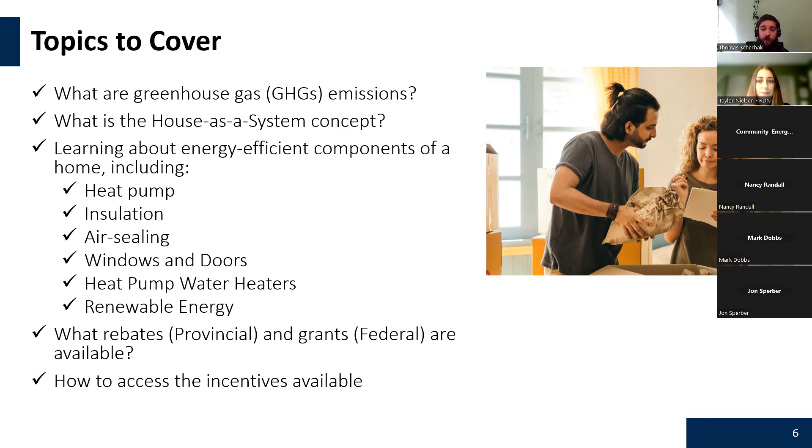Thank you so much, Taylor, for that information and those great incentives and rebates for your local area. Today we will cover a lot of topics and a wide range of things, going through first the greenhouse gas emissions, house as a system, and then all the different rebates and grants that you have available, and each program that it contributes to.

The first item we will go quickly through is what is greenhouse gas emissions. Greenhouse gas emissions are a combination of three different gases. The main gas that we're typically concerned with is methane gas, which is what natural gas is typically made of. A lot of these are contributed by human based activities, deforestation, agriculture, industrial areas, and things like that which do contribute to the greenhouse gas emissions overall.

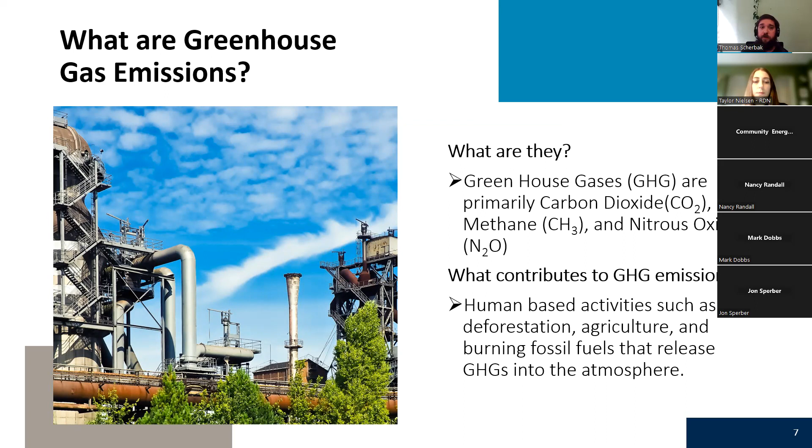When looking into our emissions for our home, natural gas takes up about 16 times as much energy for the greenhouse gas emissions, meaning there is 16 times the amount of total emissions coming from natural gas per se. Metro Vancouver has over about 90% of its total heating still done by natural gas, which is a big number and could be reduced at a much higher rate.

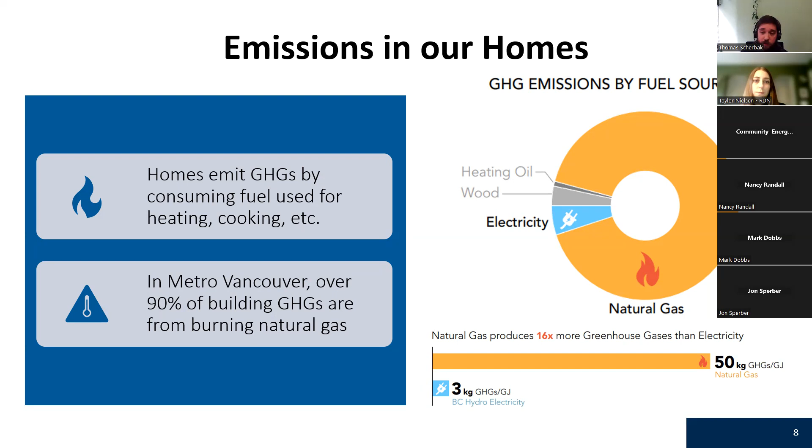Here's a good comparative to see how the oil heating and emission spectrums compare between the three different types. So we have oil heating, natural gas heating, and also a heat pump. Heat pumps do produce a little bit of emissions, but not as much compared to the other two.

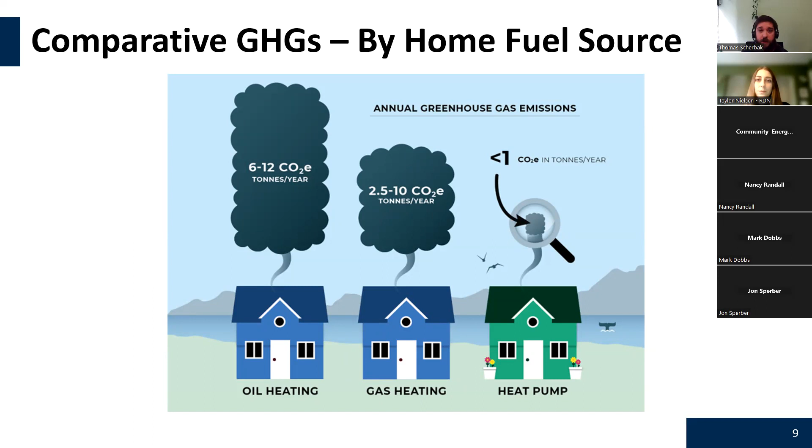Overall, the reason we want to do this is because BC has one of the cleanest green energy grids. We have about 98% of total energy generated by hydroelectric power, that's about 12,000 megawatts of hydroelectric generating capacity, with the caveat that 70% of our economy is still powered by fossil fuels. So the main goal for BC residents is to work together to create a clean electricity grid.

These are the different types of upgrades we'll go through, such as air and water heating, air sealing, windows, solar, and other things within that program.

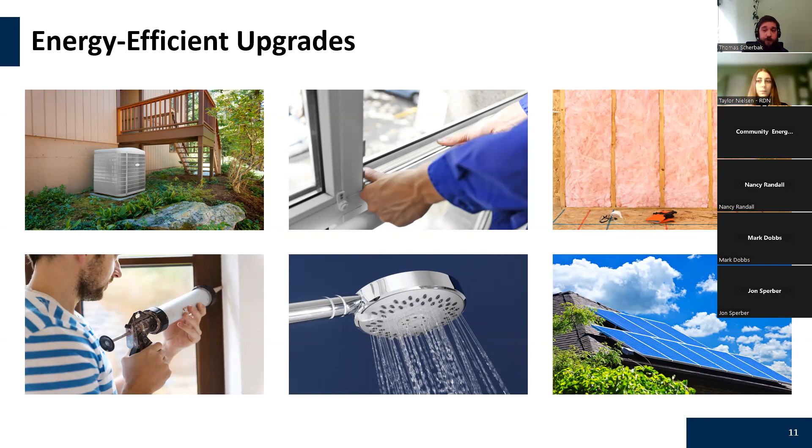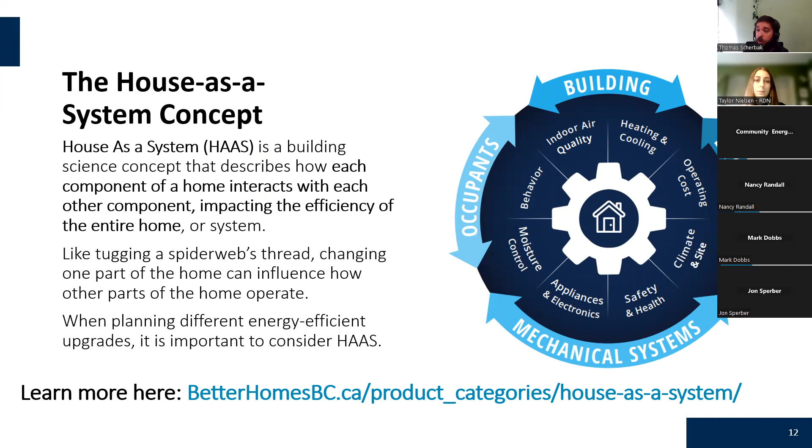First, to build those concepts, we need to talk about a house as a whole. This word gets thrown around a couple times, it's called the house as a system concept. What this concept entails is that everything within your house has a greater effect than you'd normally think. Each component in your home interacts with other components, impacting the efficiency, either good or bad, of the entire home or system. That can affect your safety, health, moisture control, indoor air quality, climate, and many other things within your house.

An example of that would be air leakage issues, where if you upgrade your insulation inside your house, you also have to think about the total moisture that's going to happen inside your house. Those things work hand in hand and need to balance each other out. Overall, you want to make sure you keep consistent temperatures within the house.

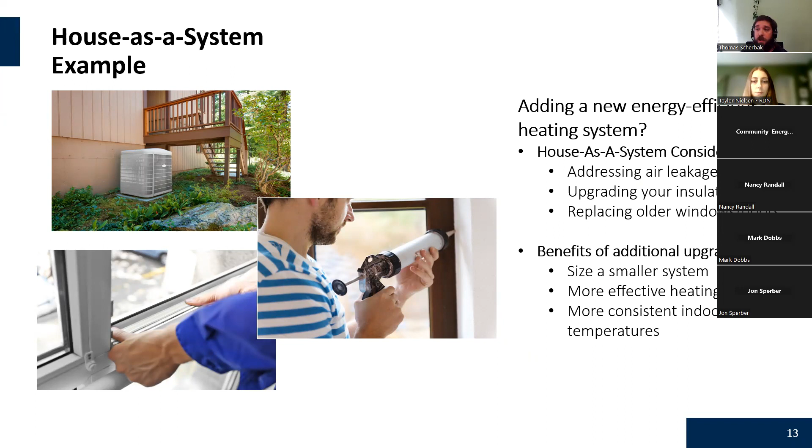Next, we'll generally go through EnerGuide home evaluations. EnerGuide home evaluations are what you need to enter into the federal program. They are basically a non-biased measurement of your house, trying to assess your overall efficiency. The energy advisor will take measurements and assess the efficiency of your home's windows, insulation levels, space and water heating, and ventilation. They will always need to complete a blower door test to measure the exchanges in your home.

There are a couple instances where they do not have to do it, based on if you have vermiculite or asbestos in the house. If you do, please always tell your energy advisor in advance just to help make sure that you're safe.

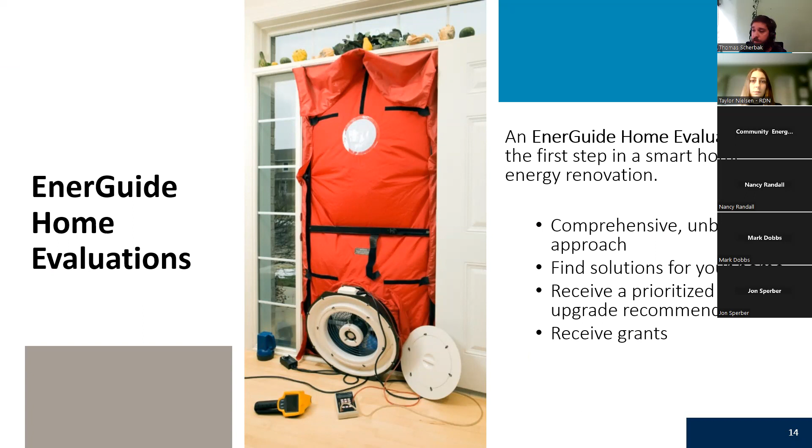First, to talk about the two key incentive programs, we'll talk about the provincial system, which has up to about 13,000 available rebates combined. There are also municipal top-ups available for every area, such as what Taylor talked about with the RDN. There are different types of top-ups you can get, so please always check your local areas for any updates.

There is also the federal grant program. There are two types of things within that: the $5,000 maximum grant that you're allowed, and also the $40,000 loan and the oil-to-heat-pump program that I'll quickly go through soon.

Layered within the CleanBC programs and offers, there are four major items. First is the Better Homes program. Most people access this and have incentives up to about $14,500. These are different ranges of upgrades and retrofits you have to do to your house to be eligible for each one.

Next, the most common one is the income-qualified program. It's always worthwhile checking out if you qualify for it, as you need to meet a certain income threshold, or be under it, to obtain greater upgrade rebates and access. That could be up to about $33,900.

The second to last program is the low-interest finance program, which is very similar to the actual loan program offered by the federal government, but is a little different as it only entails heat pump upgrades within your household. The last and most uncommon one is the new construction program, offering about $15,000 for new constructions, but it is currently fully subscribed as of right now for the end of the year.

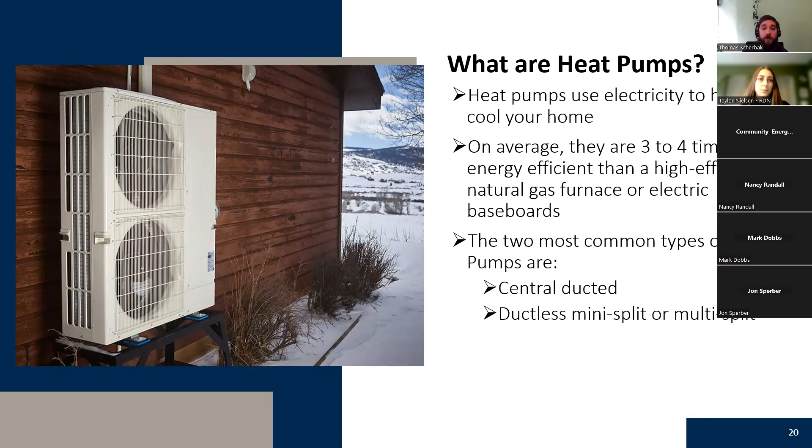On average, I would say heat pumps are 3 to 4 times more efficient than average heating systems within your house. The common ones we see are central ducted and ductless heat pumps.

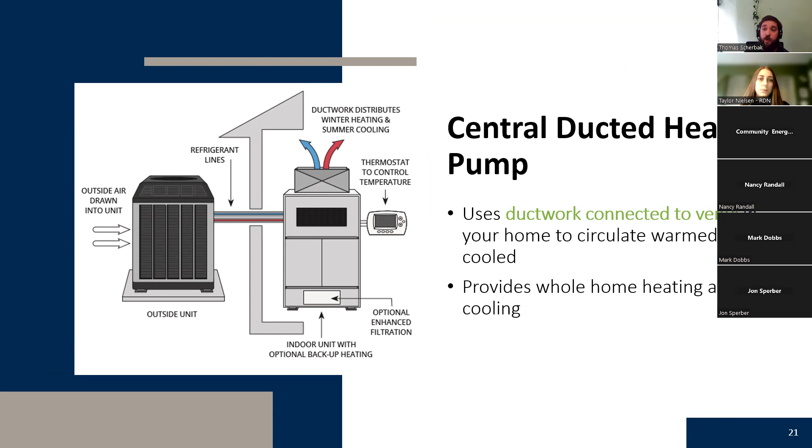First are the central ducted heat pumps. If you have an original ducted system, you can integrate this into your old system. There sometimes also have to be changes to the overall HVAC management. So be warned that you need to make sure the ductwork is able to handle the units and has the capacity for it.

The second spot is the ductless mini split heat pump. This is more or less the one where you wouldn't typically need a ducted system—you could have stuff going through walls with units such as an indoor mounted head unit. This system is a bit different in that it only provides zonal heating and cooling, whereas the central system beforehand provides whole home heating and cooling. Zonal heating just means it only heats within that certain range with that head unit.

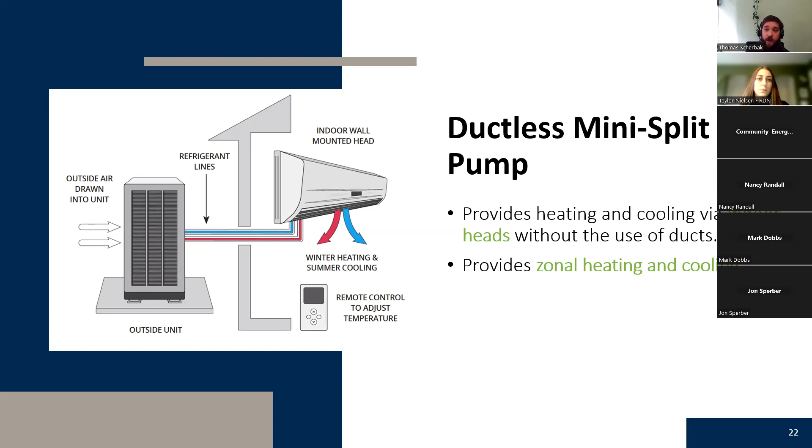Next, we'll run through the benefits of a heat pump and give you an idea of how it is efficient. It is a cost-effective option for saving yourself money. It is climate friendly, as the system does not burn any fuel—it is just transferring heat from the inside to the outside and vice versa at different times of the year.

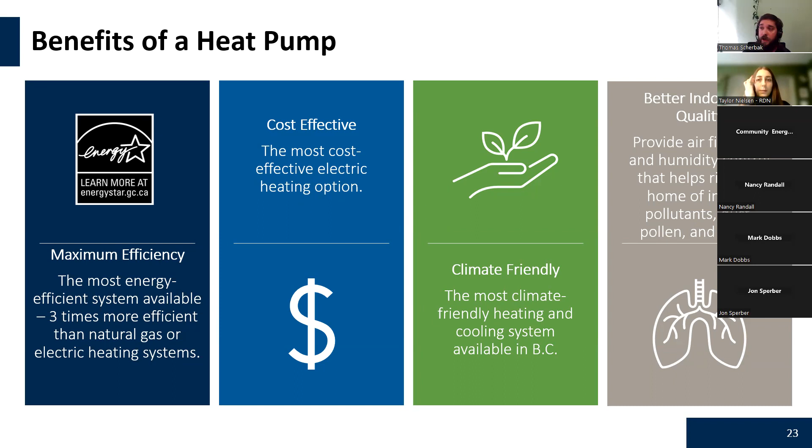The other piece too is indoor air quality. Overall, heat pumps have an evaporating ability, so they're able to hold or change your humidity and control it a bit more for health and better indoor air quality. The second piece, similar to indoor air quality, is cooling and dehumidification, so your house is a little less stuffy and better overall maintained.

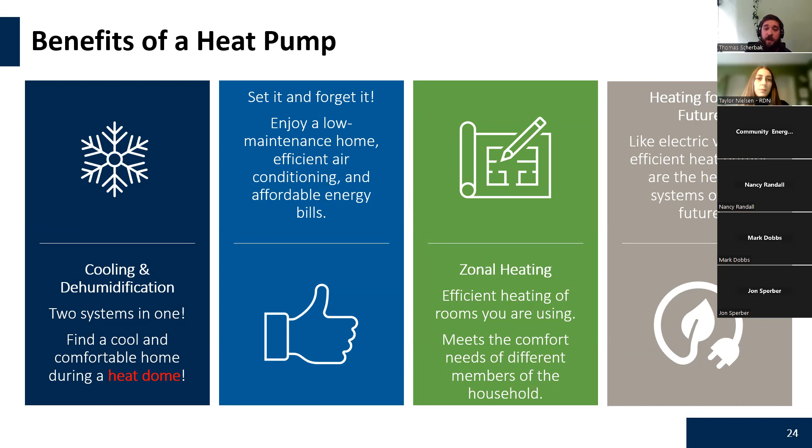Easy ways to always think about heat pumps: you can set them and forget them. You typically want to not overrun them or change them too frequently—you want to allow them to stay within a range of about 2 degrees Celsius. Other things too—it's a heating item for the future, making sure we are moving our grid to a more energy efficient grid.

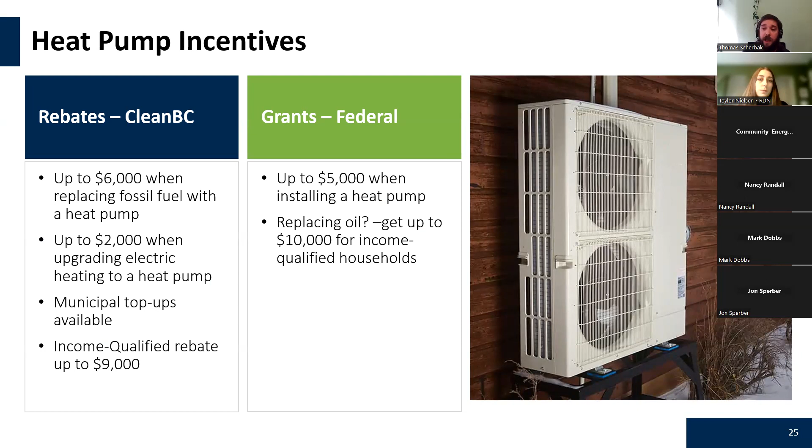These are some of the rebates available to you, both on the CleanBC and federal side. First, with CleanBC, you're eligible for up to about $6,000 for central ducted units, about $2,000 for electrically heated units, and municipal top-ups as well, with income qualified options there too. Just one note—if you're replacing from oil, there's that affordability program as well. You can access up to about $10,000.

Major heat pump terms that typically come up within quotes are the HSPF rating, or heating seasonal performance factor, which measures heating efficiency for a heat pump, and the SEER rating, or seasonal energy efficiency ratio, which measures cooling. The higher the number, the more efficient it is. Typically, for rebates and grants, you will need a 10 HSPF or higher.

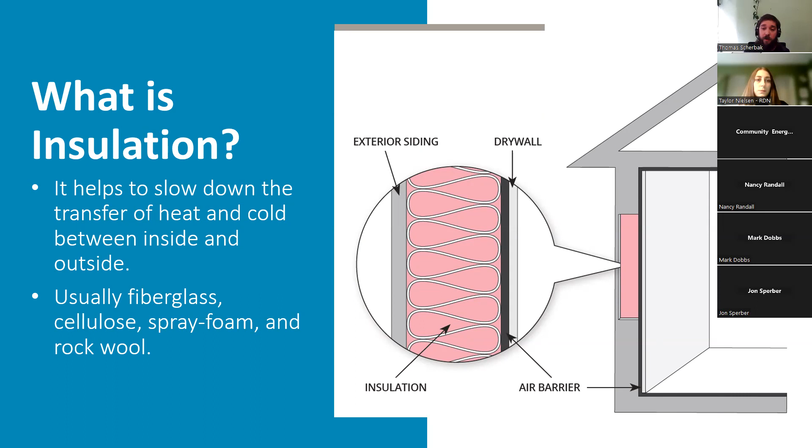Next, we'll talk about insulation. Insulation is basically like a large, thick coat going over yourself. All it's trying to do is slow the heat transfer between outside and inside, keeping your house at a consistent temperature. Typical materials used are fiberglass, cellulose, spray foam, and rock wool.

The overall benefits of insulation are increased retention of hot air inside your house, overall comfort, reducing GHG emissions, keeping the house quiet, and reducing overall maintenance, since it won't be as cold an area, so you won't be losing as much heat from your house.

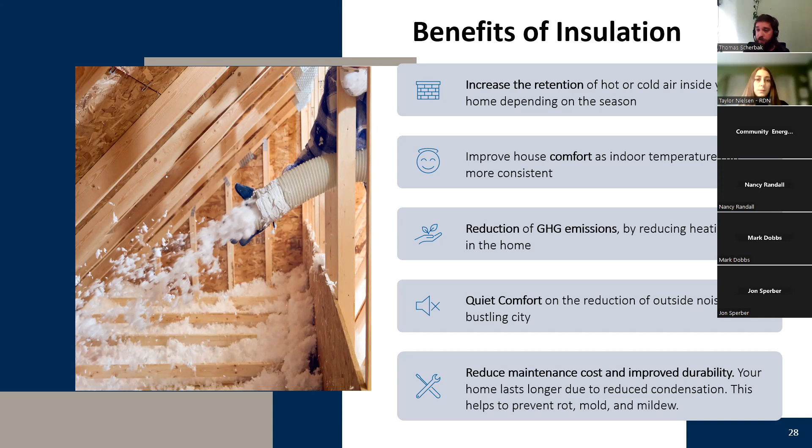There are also some insulation incentives. Attic insulation gets you about $900, and these are all broken down within these categories. With CleanBC rebates, you're allowed to access each one individually, whereas with the grant you're only allowed a maximum of $5,000, as a reminder.

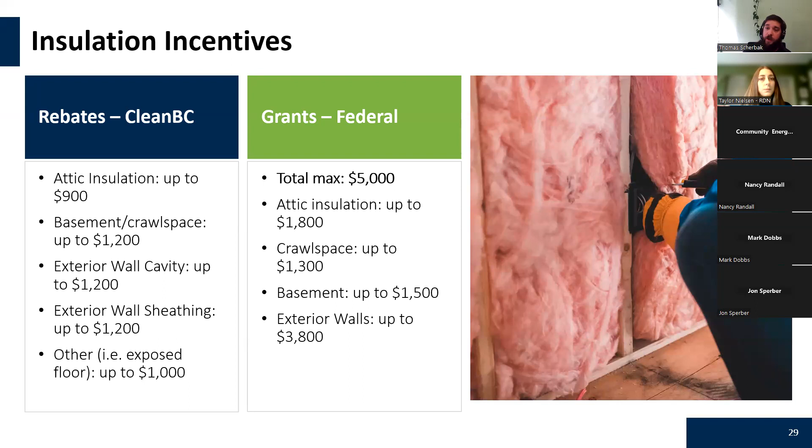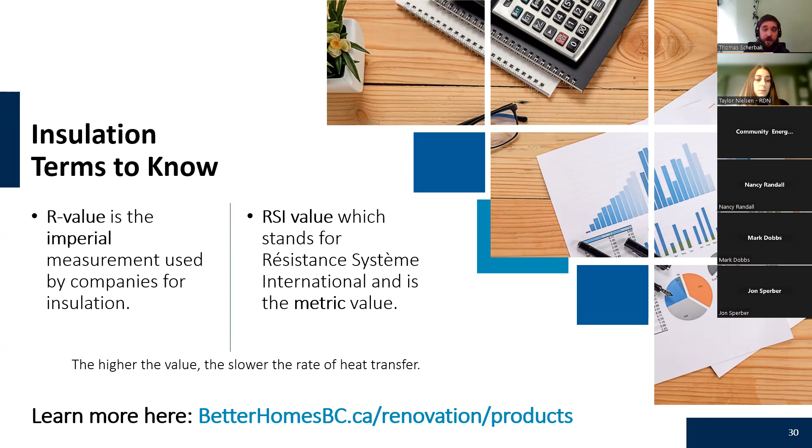Major insulation terms to know are the R value and the RSI value. The R value is an imperial value typically used, like R12 or R22 - those are the typical values you hear. The higher the value, the less heat transfer there is, meaning you'll lose less heat out of your house. So it's always best to buy as high a rating as possible to fit your house. Insulation contractors will best know what's right for each area, such as attics or exterior walls, and the best method to use.

What is air sealing? Air sealing reduces the amount of air and moisture within your house. It's like having an open door to the cold weather - nobody likes leaving a door open. It lets heat out, and air sealing basically closes those small doors for you, making sure you handle those small, simple things, like weather stripping and covering up your plugs. Very simple, small things can have a bigger overall impact on your house's air sealing.

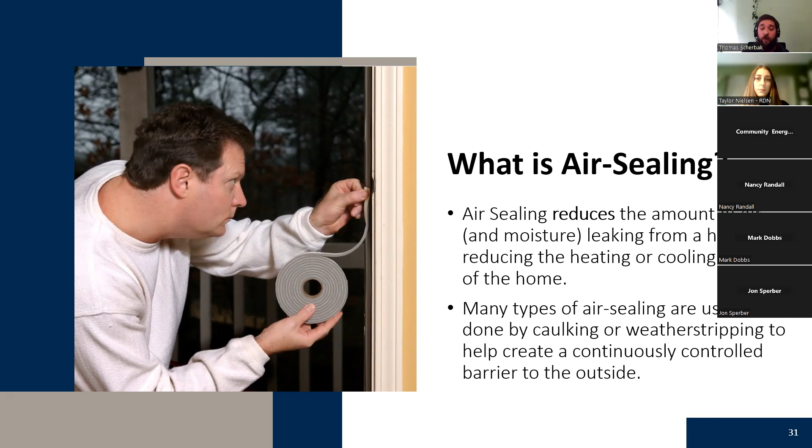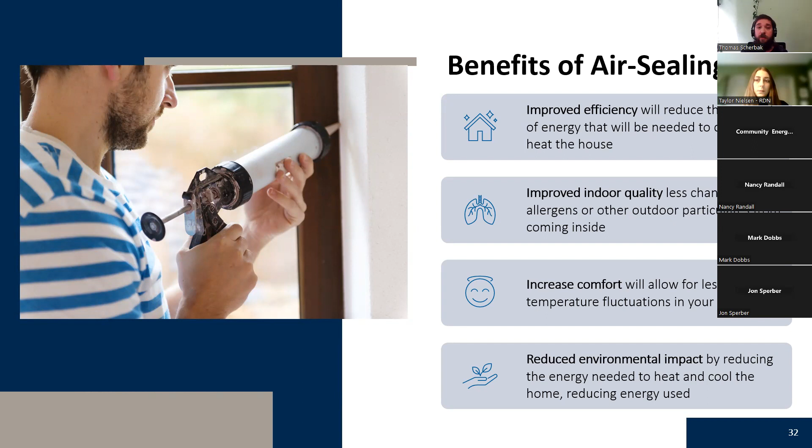The overall benefits from air sealing are improved efficiency - your house will reduce the amount of air going outside, so you're losing less heat. You'll get overall better indoor air quality, since outside air won't be coming in, and increased comfort, as the temperature will stay consistent within your house. You'll also reduce the environmental impact, since your heat pump won't have to run as hard to keep the house warm.

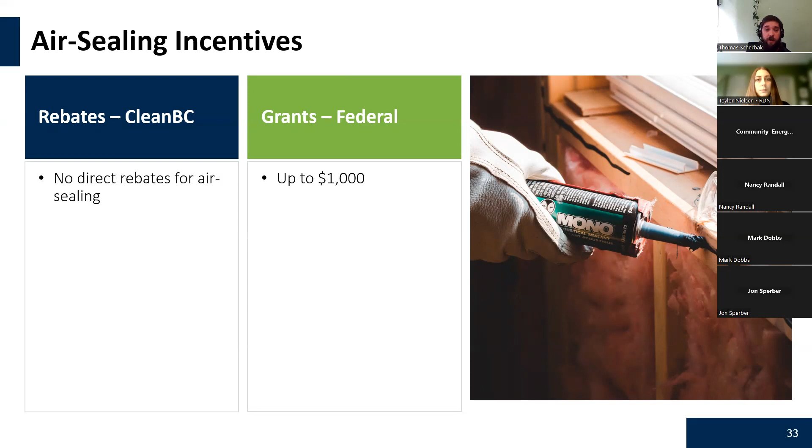Currently, there are no rebates for air sealing within the CleanBC program. It's typically better to just do it alongside the insulation rebates and tailor it in with that. With the grants, there is a small rebate of about $1,000 that you could access.

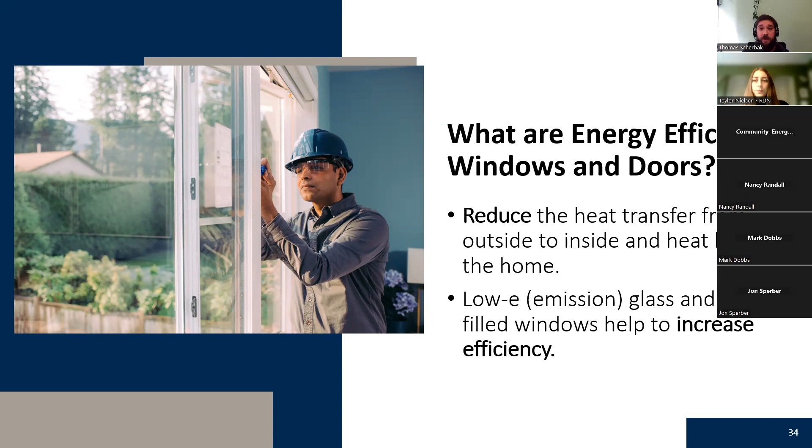Next, we're going to talk about windows and doors. The higher the efficiency, the more it will reduce the amount of heat loss going out of your house. Single pane windows are not as efficient as double pane or triple pane windows. These new windows have better coatings or gases typically inside of them, which help reduce the amount of heat loss through those windows. Triple pane windows filled with gas will be very efficient in reducing the overall amount of heat loss out of your house.

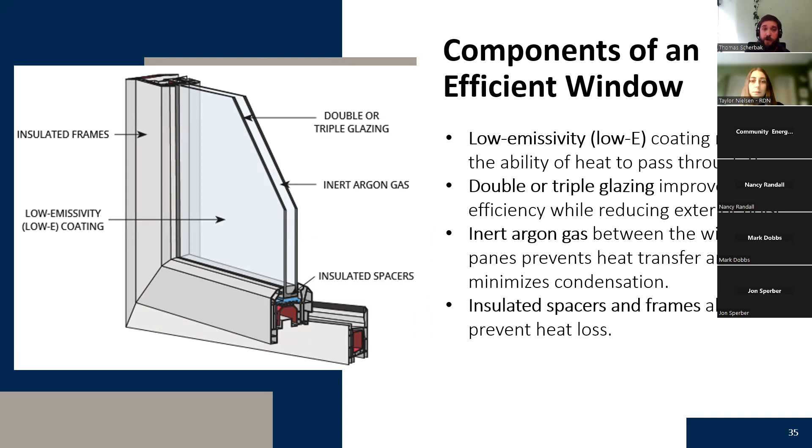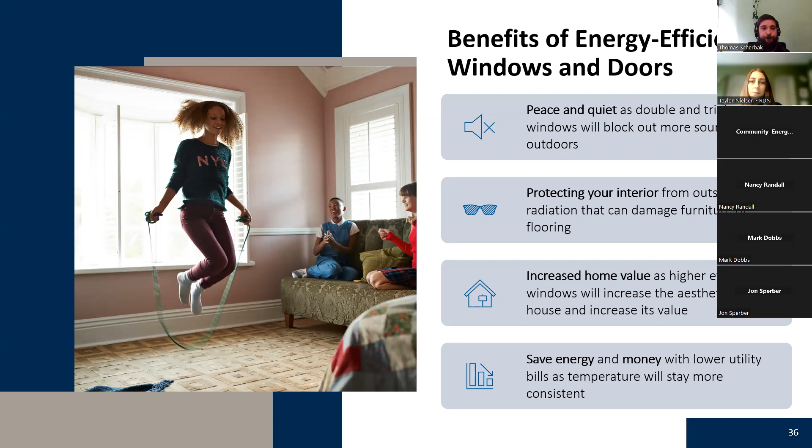Window terms to know include the U factor. This is the most common overall number used within windows for determining overall efficiency. The first two numbers you'll typically come in contact with are imperial versus metric. Metric is typically used within Canada because it is the standard, but you will also sometimes see an imperial value with American companies. That imperial value, if you ever need to convert it, is 5.678.

Overall, most windows should be ENERGY STAR certified. That is also the requirement within the federal program, so always make sure they're either ENERGY STAR certified or certified with one of the major window certification companies. Also make sure they have a low E coating. An easy way to tell is when you look at the side of the window, they're typically almost a green hue, or have a little bit of a weird color. That means they are filled with that low E coating.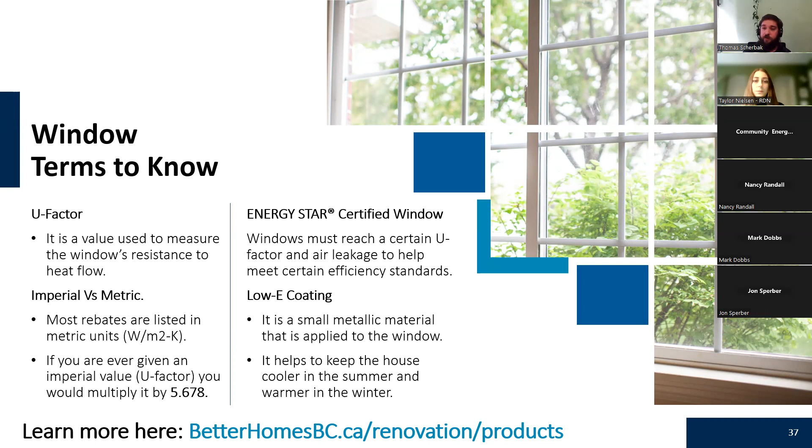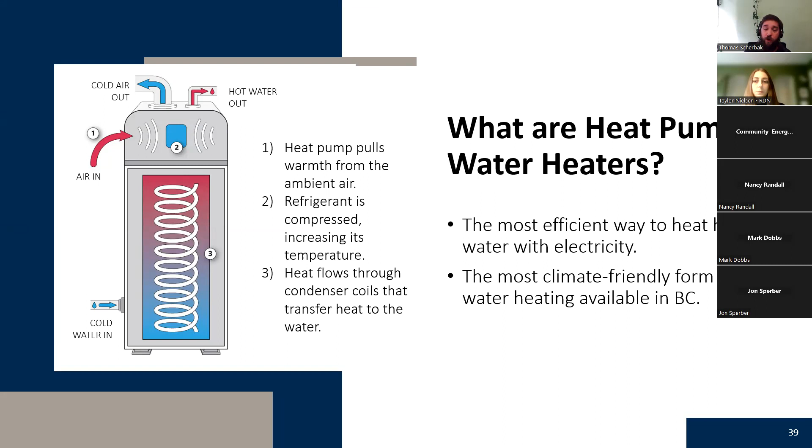The last couple sections here I'll be talking about are heat pump water heaters. They are most efficiently the best kind of water heating system out there, as they use the same system as a heat pump, transferring heat from one section and going out. Overall, they are the most climate friendly for most homes and are typically very efficient.

They have lower greenhouse gas output overall, producing about 95% lower carbon footprint than a natural gas heater. Overall, the energy efficiency is dramatically better when compared to other types of water heaters. You can also usually have smart controllers so you can manage your heating control loads and make sure you're not heating water unnecessarily. Overall reliability of these heat pump water heaters is also a bit better, as there's not as much heating and cooling over time, and you don't need a pilot light running all the time to heat the water tank, so gas isn't being lost from that as well.

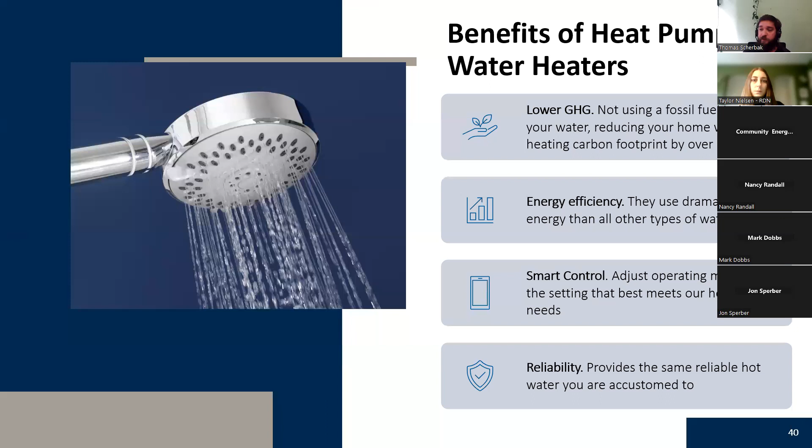These are some of the rebates available for heat pump water heaters. There's about $1,000 from the CleanBC rebates, and then municipal top-ups as well, so always double check what's available for your local system.

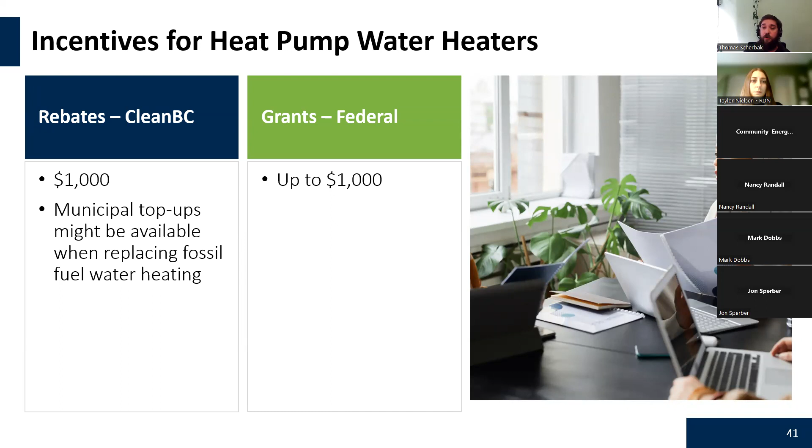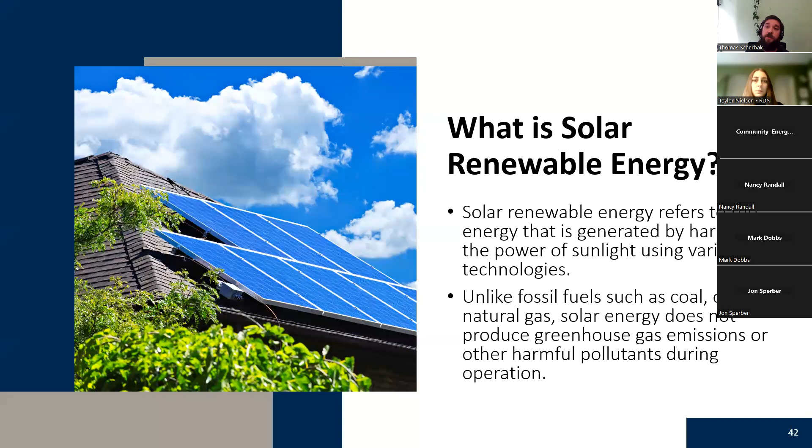The last section we'll quickly go through is solar renewable energy. Solar renewable energy is generated by harnessing the sun's power. Unlike fossil fuels, you don't have to burn anything. You will not be producing any greenhouse gases, so that saves a bit of the environment.

The overall benefit of solar is it increases your overall resiliency from the power grid. As temperatures rise, we're having more reliance on these fossil fuels, and with that comes scarcity and security concerns with those items as well. Having more resiliency and staying away from that means you won't have to demand as much from the power grid.

Overall, it would increase your home value as well. With installation, the homeowner doesn't have to pay as much for energy costs, so it'll be more of a benefit when selling the house too. Like I said earlier, it would also save you on your utility bills, making sure you're saving a bunch of money.

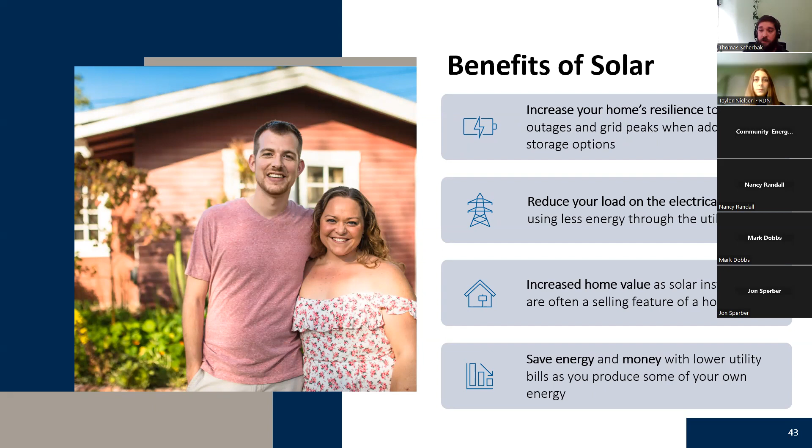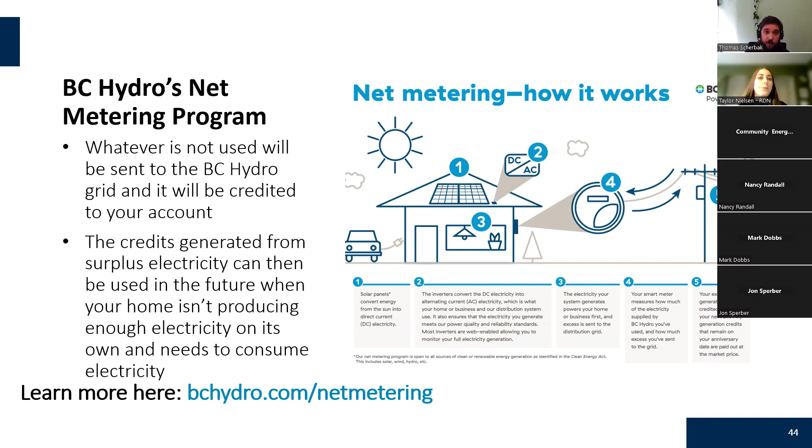With the BC Hydro Net Metering Program, which you can join, whatever amount of energy is not being used you'll typically be able to send back to the grid, and they will provide you credits generated from that surplus electricity you're creating. Then when you need energy from the grid, they will provide those credits back to you, giving you the ability to take back a little bit of extra money to save on your energy bill.

Currently within the CleanBC system, there are no incentives for installing solar, just the BC Net Metering project that will be through BC Hydro. Grants wise, you can get about $5,000 for that. And then you can also get another $1,000 for batteries connected, with only a max allowed, obviously, as the $5,000 for all upgrades.

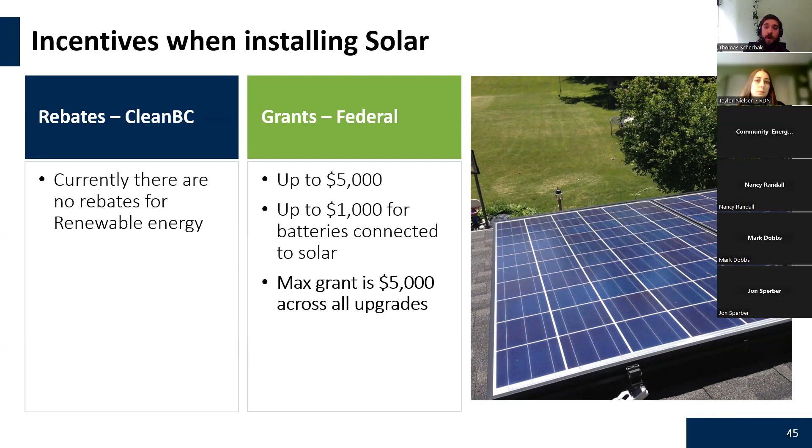There's also tons of FAQs within the CleanBC program and Energy Coach program. I always implore you to go check that out and make sure that everything is good, and you could see where you might have some questions and answers that could be answered from there as well.

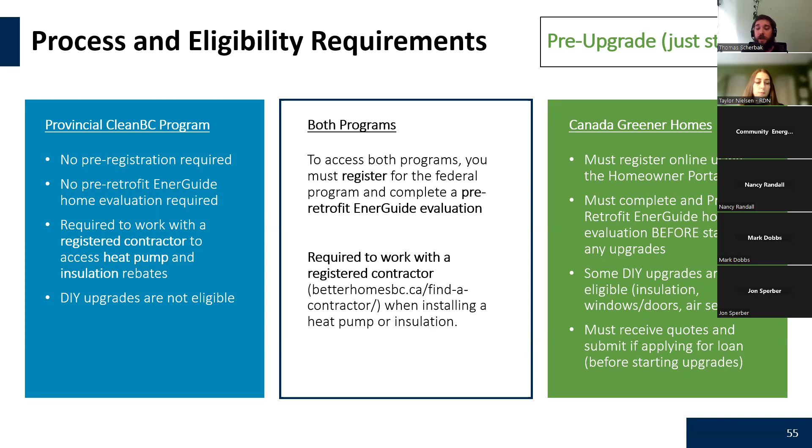Also with that, when you are applying for the loan program, you are going to need your quotes ahead of time, as they are needed for you to apply for that loan to get access to those incentives.

Both programs, you always need to collect and gather quotes for your upgrades and eligible things. You can always ask the CleanBC Energy Coach services for any questions on eligibility requirements, such as, does this heat pump meet my eligibility requirement? Please ask them those questions.

With the federal program, all you need to do is make sure that it's eligible, that all upgrades are completed as planned, that you also have finished off your post retrofit, as I explained earlier, and then you will apply with your invoices and all your upgrade receipts with that.

Key reminders that I want to quickly go through here are each upgrade will have to have specific requirements. Always check with both the federal program and provincial programs, as both can differ from each other. They can either differ on the amount of money given or the overall requirements for that upgrade. If you have any questions, always contact the respective authorities to be able to answer those questions.